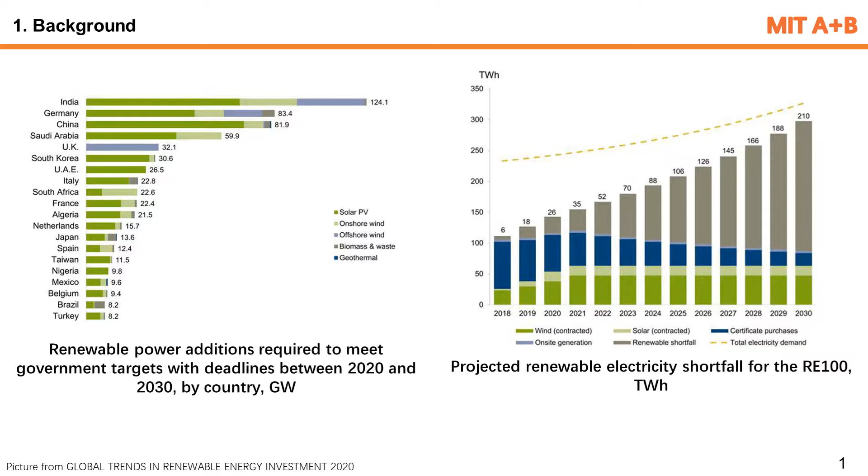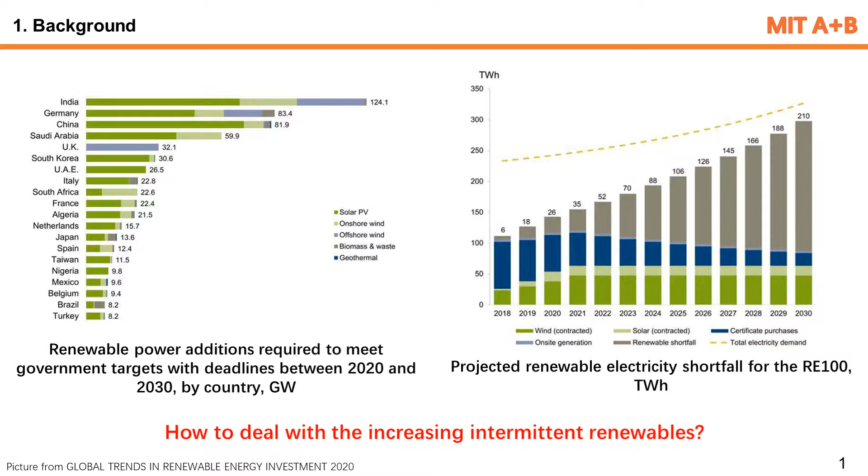The right picture shows the increasing renewable shortfall for the RE100 from 2018 to 2030. The future must belong to renewables. But as most renewables are intermittent, how can we deal with the supply and demand issue of renewables? Energy storage technologies can be the answer. There are many types of energy storage technology for different applications at different scales.

As a promising solution for grid-scale storage, liquid air energy storage has attracted extensive attention over the years due to several advantages. The right picture shows the concept of the baseline LAES.

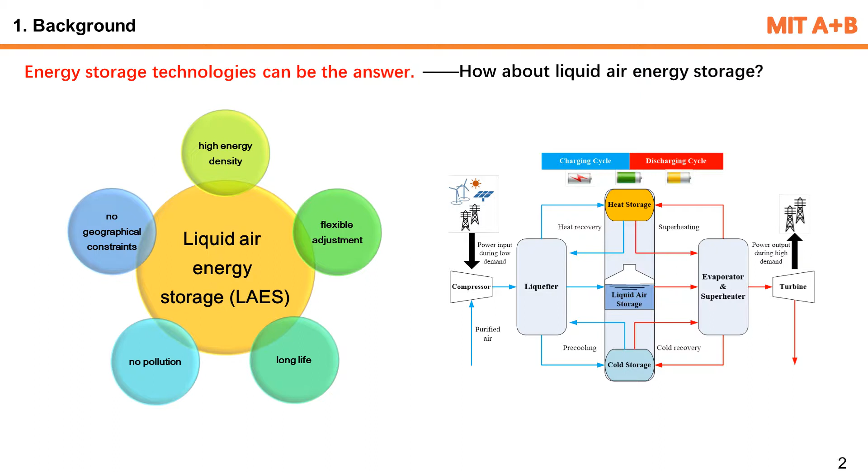However, most traditional LAES studies ignore the power consumption of H2O and CO2 removal. Actually, removing H2O and CO2 is important in cryogenic cycles. But mostly, it is assumed that inlet air is purified, resulting in overestimated round-trip efficiency. It is also unknown how the air purification removes impurities and regenerates later. There is no mathematical modeling of air purification in LAES now.

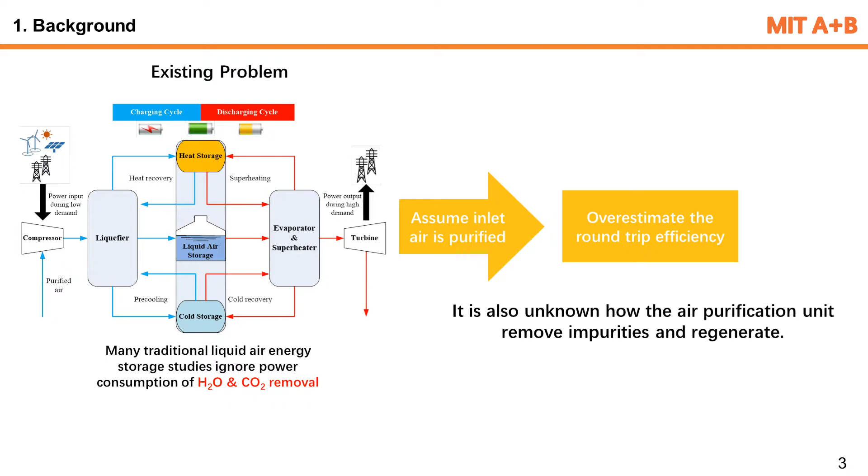This is the first LAES pilot plant in the world. I took this photo last year at the University of Birmingham. Actually, the pilot has an air purification unit, which is marked by the red circle, although it is hard to see the body of the air purification unit from the picture.

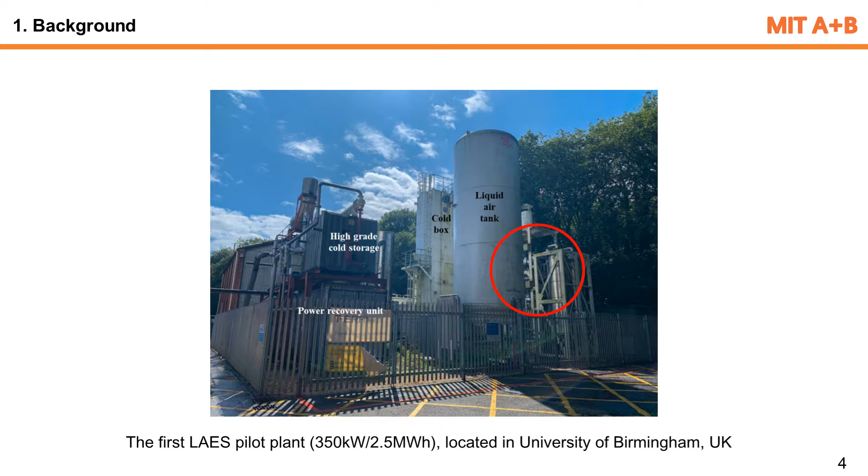This page shows the flow diagram of the proposed LAES system, which consists of a charging cycle and a discharging cycle with a regeneration step of the adsorber beds. At off-peak times, the charging cycle is powered to produce liquid air by excess electricity. H2O and CO2 in the ambient air can be removed in the adsorber beds.

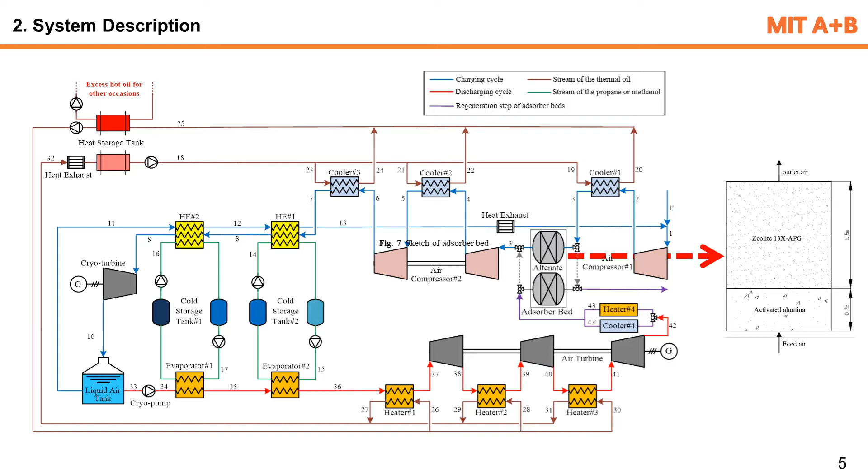At peak times, the discharging cycle works to generate electricity, and the air exhausted from the discharging cycle goes through a heater to heat the adsorber beds, and then goes through a cooler to cool the adsorber beds for regeneration. This study focuses on the H2O and CO2 removal in the adsorber beds.

The characteristics of H2O adsorption on activated alumina can be obtained easily from research papers, which show activated alumina has good ability of H2O adsorption in the air. But it is difficult to find the characteristics of CO2 adsorption on zeolite 13X APG at a specific state in the air purification process. The analysis of CO2 adsorption is crucial to this work.

Monte Carlo simulations of CO2 adsorption are therefore carried out in order to verify the feasibility and advantages of removing CO2 by the zeolite 13X APG. We reconstructed the zeolite 13X APG modified on a FAU structure. The left figure shows a final snapshot of the modified zeolite 13X APG.

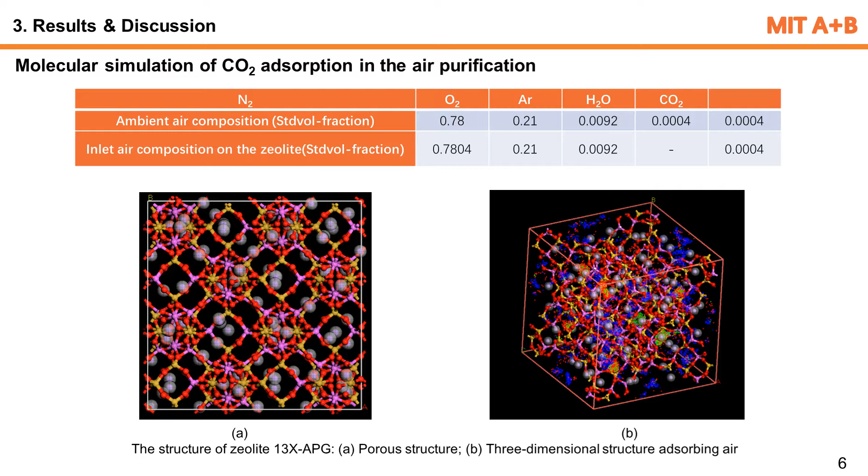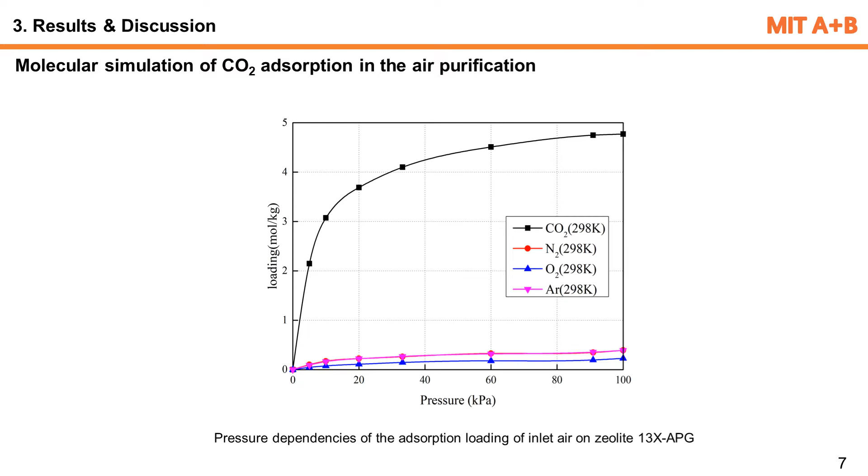When applied pressure increases from 0 to 100 kilopascal at the working temperature, the adsorption loading of CO2 is much higher than that of nitrogen, oxygen, and argon. It reveals that zeolite 13X APG has a preferential selectivity of CO2 adsorption compared with other components.

At the working pressure, the adsorption loading of CO2 decreases greatly when the temperature is between 295 Kelvin and 323 Kelvin, whereas the adsorption loadings of nitrogen, oxygen, and argon decrease slightly. When the temperature is around 443 Kelvin, the loading ratio of CO2 is nearly zero. This provides the theoretical foundation of heating the adsorber for regeneration.

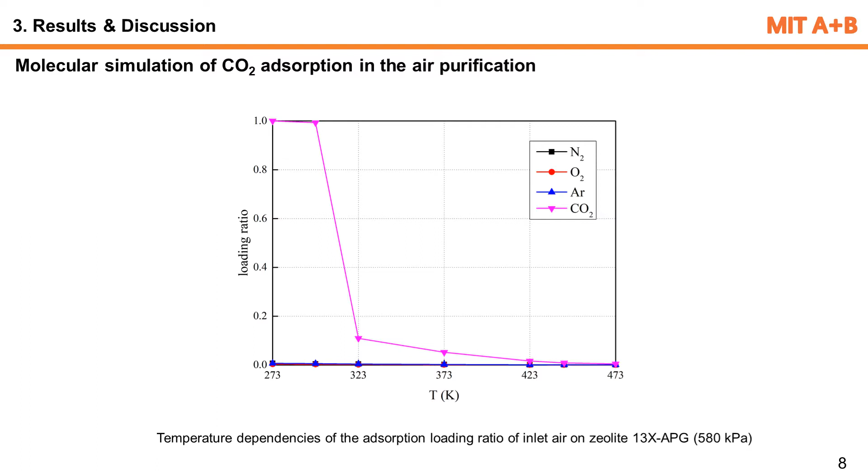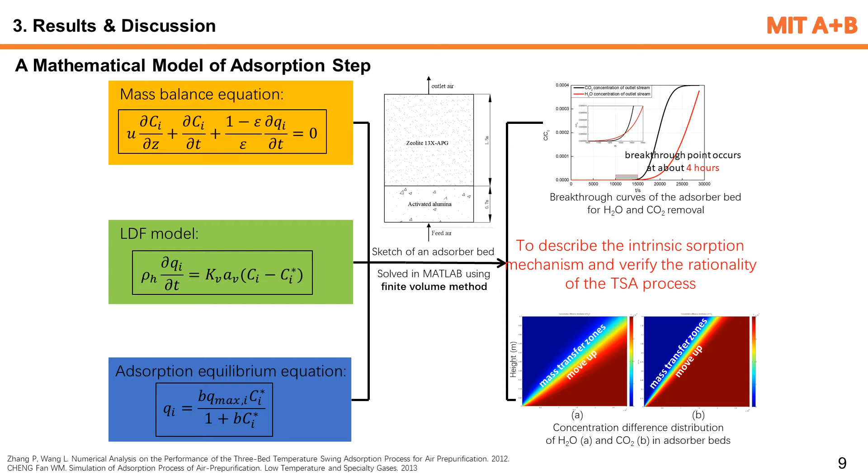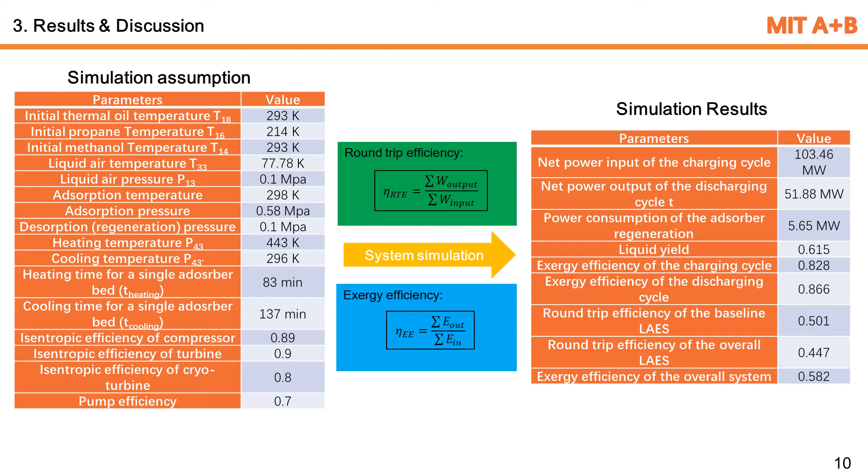The left table lists some simulation parameters. The right table shows some important simulation results. Round-trip efficiency and exergy efficiency are employed as two key parameter indexes. The charging pressure in the charging cycle affects the performance of the proposed LAES.

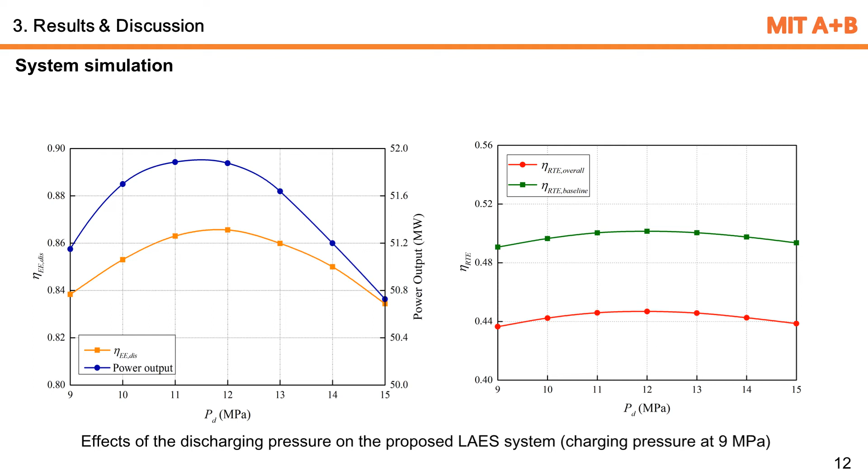From the right picture, it can be seen that the round-trip efficiencies of the proposed LAES and the baseline LAES both increase first with the increasing discharging pressure, and also peak at around 12 megapascal. Compared with the discharging pressure, the charging pressure has a more significant effect on the round-trip efficiency of the LAES system.

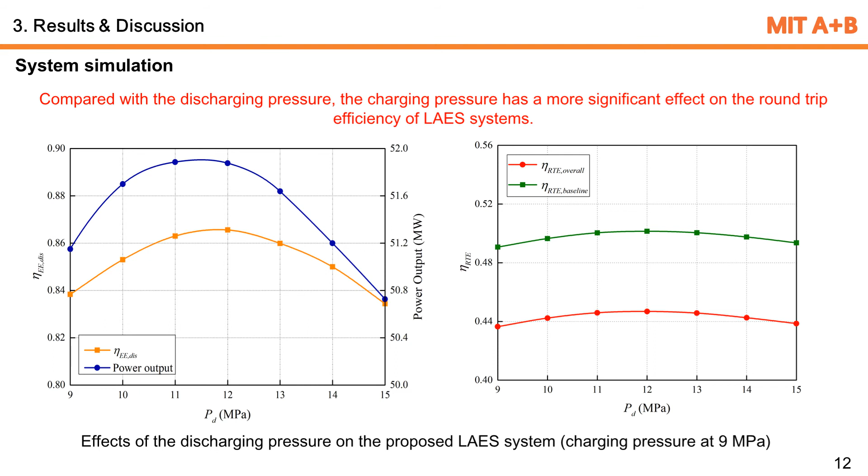Here are our main conclusions. First, Monte Carlo simulations of CO2 adsorption are carried out to show the zeolite 13X APG is more selective to CO2 in the feed air. Secondly, a heating step at a high temperature of 443 Kelvin is a necessary and effective way to regenerate the adsorber.

Thirdly, the results show that the round-trip efficiency of the proposed LAES system with air purification is around 0.45 and the exergy efficiency is around 0.58. Then, compared with the discharging pressure, the charging pressure has a more significant effect on the round-trip efficiency of LAES systems. Finally, this work indicates that the round-trip efficiency of the current LAES system is overrated by around 5%.